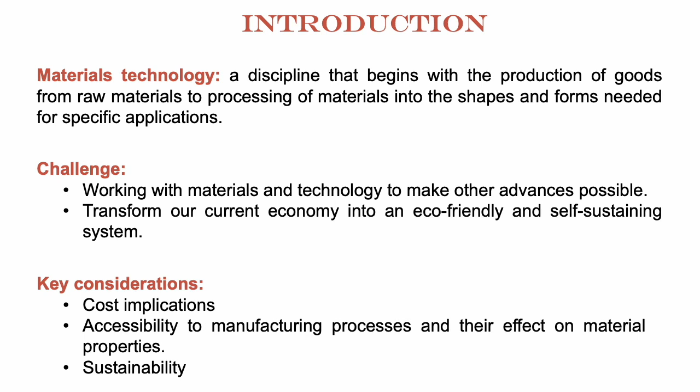Materials technology is a discipline that deals with materials and production techniques, either to design, produce, and optimize existing products or to develop new ones. The challenge we face is generally sustainability and securing our future, which is future-focused design practice. It's important to consider the cost implications of materials and production techniques, and consider sustainability as well.

This is the plan. We first define the scope of the subject, and then ideally identify the needs or problems, because when thinking interdisciplinary, since we're coming from different design backgrounds, we will have specific requirements of materials. I'd advise you keep that in mind throughout the subject. Think interdisciplinary, think about your specific discipline, what you would require materials for, what the specific requirements of materials and processes are, and then we'll focus on applications.

Let's expand a bit more. Module 1 runs similar to Module 2, and Module 3 would be the block in person. The important thing is that each day it's advisable that you get together as a peer-to-peer discussion on whatever we've done in class or as self-study. Get together with someone in class just to keep in check and see if you're on the right track, or see what the other person is doing, because the key thing is interdisciplinary—it's not going to be the same for everyone, as you'd expect. So it's important to have these discussions afterwards.

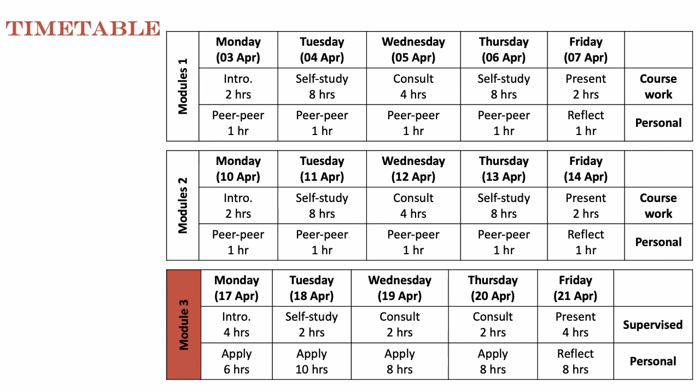Afterwards, again, you'll be given time to apply what we would have introduced and spoken about. These are the actual dates that we'll be doing these different tasks.

This gives a general idea of the outcomes or deliverables, the things I'm going to ask of you from the content we would have covered. It might not necessarily be all of them, but some of them. The first one being the analysis of articles, which you have.

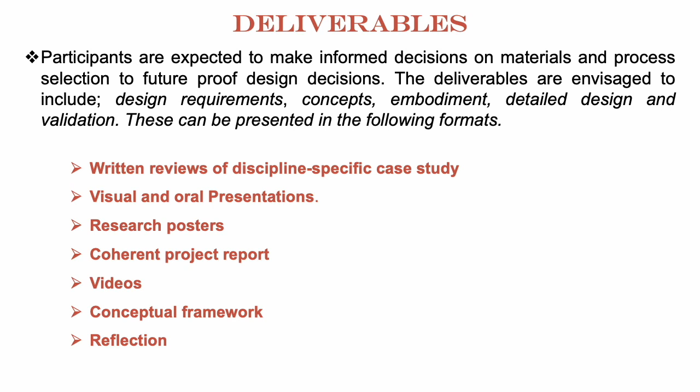That's why you have to engage afterwards in the peer-to-peer, so we're creating a culture of shared ownership. The objective of materials technology is to recognize the impact that materials and technology have on our world today, and make informed decisions regarding material selection using a list of requirements.

The list of requirements comes into play because it depends on what you're trying to do or what you need materials for. You need to synthesize the key concepts, because when you think of materials, it's not necessarily the material you're looking for—it's what the material offers, the property attributes. Not all of them are necessary, hence you need to synthesize the key concepts into a coherent, structured material selection, choosing the material based on the property attributes materials can offer.

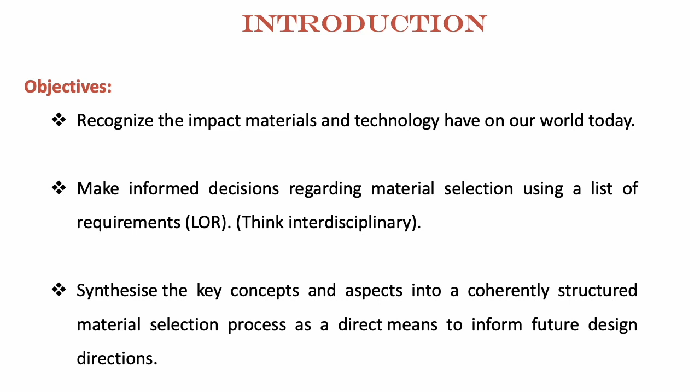That will inform the future design direction. So in general, you will bump into design factors depending on your discipline. You need your design to do a specific function or to have a purpose, and you need to have a specific context.

Depending on the discipline, or maybe in all disciplines, we're hoping for our designs to be human-centered. We're looking for creativity and innovation, visual, tactile, and aesthetic qualities. We're looking for sustainability, we need to consider costs, and we need to consider legal responsibilities because they restrict what we can do—that has to be considered as well.

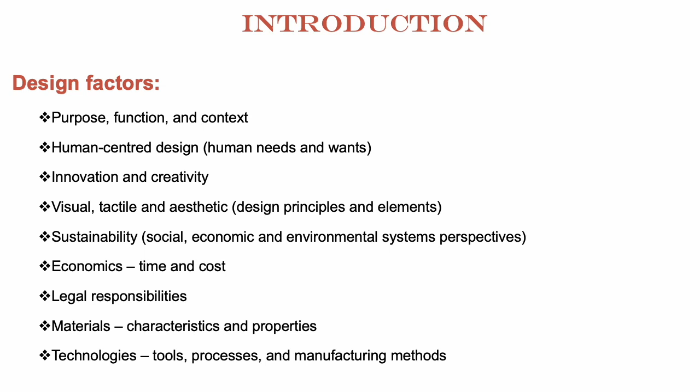Materials technology: we need to consider materials because, for the purpose of function, you can have materials that help meet specific functions or purposes—hence the material selection and the processes to achieve certain purposes, functions, or contexts. Certain processes work better than others to achieve what you're trying to do. So, coming to the context of this subject guide, we're introducing materials and processing techniques.

If you think about where you are now and look around, what materials do you see? Bear in mind that materials are substances out of which things are made. So you can realize how broad materials can be.

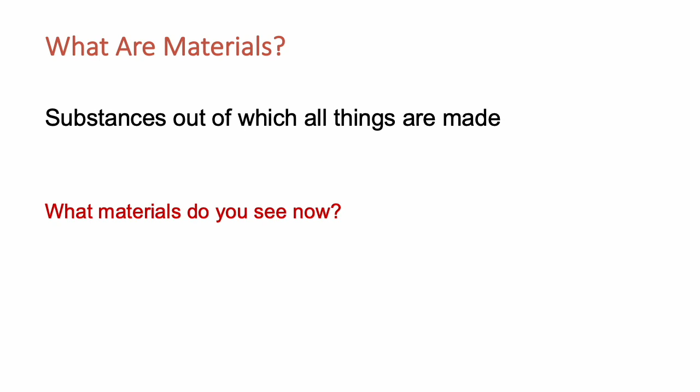Throughout history, we've had new materials being grown, designed, or manufactured, and they change how processes work—processes have to change to best suit the new materials that come into being. So materials, technology, and science are interlinked and influence each other—the technology advancement, the science advancement, and the advancement of materials themselves are all interlinked because they influence each other throughout history.

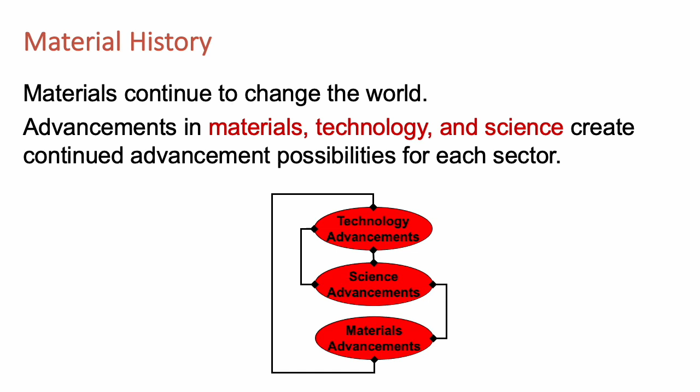That's what's been happening—you have new materials, and you can't process them the same way as you used to process the previous ones. Scientists in laboratories create or generate new materials that influence new technologies, and so on. So to understand materials, we first need to understand certain things.

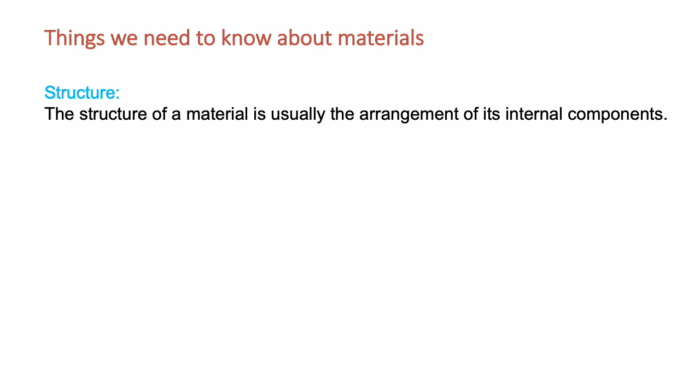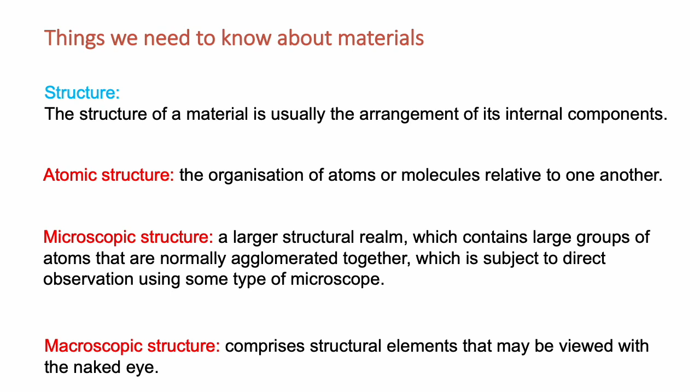The first thing we need to consider is structure, which can be considered in terms of atomic, microscopic, or macroscopic structure. We need to understand structure if we want to understand materials. Materials do what they need to do because of, one, structure, and again because of properties and processing—how you process the materials influences the functionality of the material.

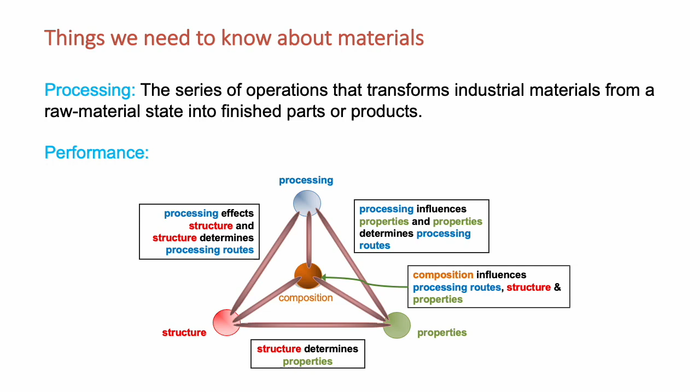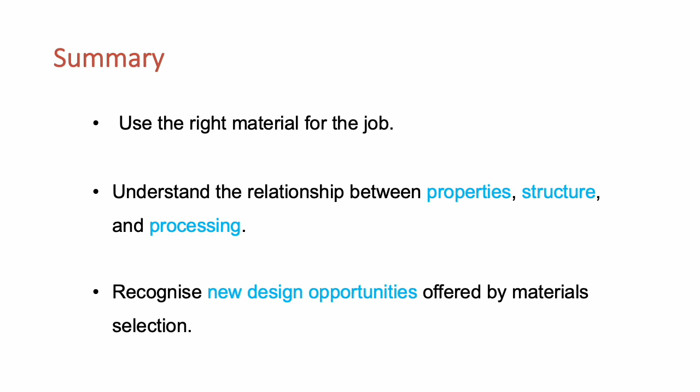As you can see in the diagram here, processing will influence both the structure and the properties. So in summary, all we are trying to do is use the right material for the right job. We need to understand the relationship between properties, structure, and processing, because they influence each other, and we need to recognize new design opportunities offered by materials and select the appropriate ones.

So to understand the classification, we can go backwards and say materials form part of material science and engineering. We have different materials suitable for engineering, for physicists, for biologists, for chemists, and for you guys as designers—product design, engineering design, architecture, graphic design, and so on. You are likely in your discipline to deal with some of these materials, if not all.

The important thing is the classification of materials does not change. What changes is the application in different disciplines. So we need to understand the distinguishing characteristics of the different materials so we know how applicable they are in our different disciplines.

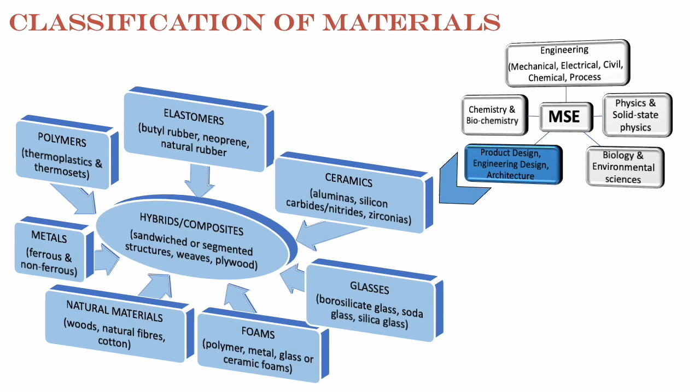And for instance, polymers will always be polymers, classified as either thermoset or thermoplastics, and that doesn't change. What changes is the applicability of these classes to different disciplines, which is for you guys to figure out. For fashion, it will be either organic or natural materials, or synthetic materials as well. We just need to think interdisciplinary in terms of classification and distinguishing characteristics to choose the best material for what we're trying to do in our different design disciplines.

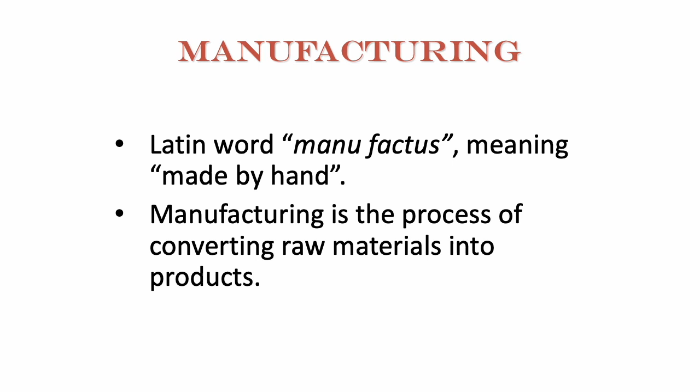So in terms of manufacturing, now that we've covered classification, we go into the processing techniques. From the Latin word manu factus, meaning made by hand, manufacturing is the process of converting raw materials into products, which links well to materials technology: the discipline that deals with converting raw materials using different processing techniques into functional goods.

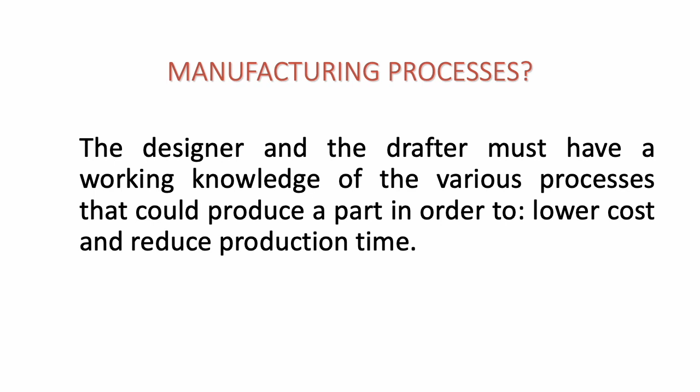So as designers, why do you think it's important to study manufacturing processes? The manufacturing process starts with design first. Then after design, you select the appropriate materials for your design. Then you need to select the appropriate method of producing your design. These three things are important.

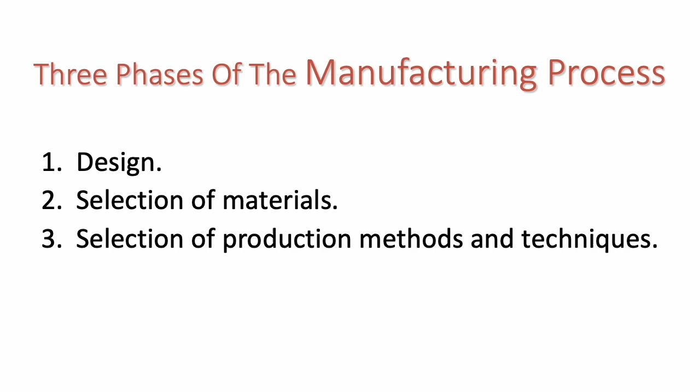These three things are important in the manufacturing part of materials technology. It's not necessarily focusing on manufacturing, but it links to you as designers: you need to design, select the appropriate materials, and select the appropriate production techniques for what you're trying to do, since some are more suitable than others. You can think of this in the context of your own discipline, but I'll use this example to illustrate the point.

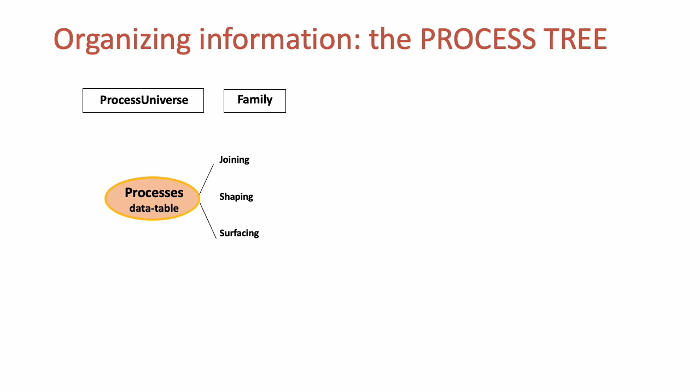Choose the right processes—there's a hierarchy you can use. When we get to block week, this will be a typical outcome to show your process work and what informed your choice of processing techniques and materials. So you have a database, because you don't necessarily need to focus on manufacturing, but you need to know about it. You can go to the database and figure out what processing techniques are at your disposal.

Depending on what you're trying to do—join, shape, or do a surface treatment—you can make a choice within those processes. If it's shaping, that can again be broken down into different types of processes. The aim is to choose the best one. What are the shaping methods? Casting, deformation, molding, composite, powder shaping techniques, or rapid prototyping.

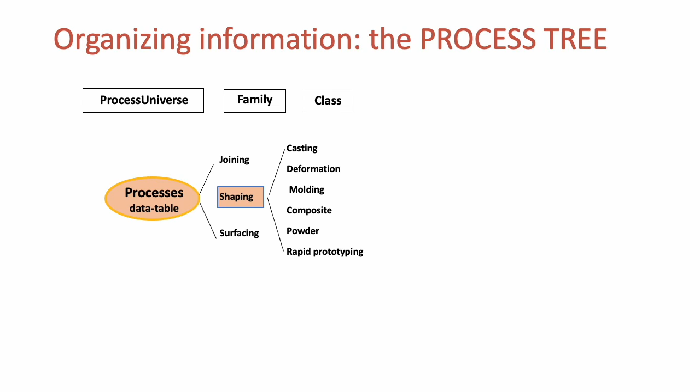Which one is best? If you think it's molding, what are the different ways you can mold? Compression—then you'd need to know the types of materials that work best for compression processing, or rotational molding, or injection, and so on. If it's injection, what are the typical costs associated with this? What tolerances can I achieve? What are the specific shapes, the intricacies of what I'm trying to do?

So this has to translate into your choice of processes or materials stepwise, to show that you've covered all angles. This is the kind of thing I would look for in a technical report when you're talking about materials and processes—what have you considered?

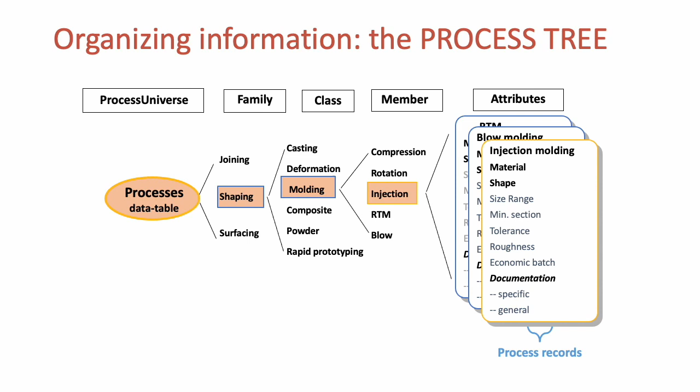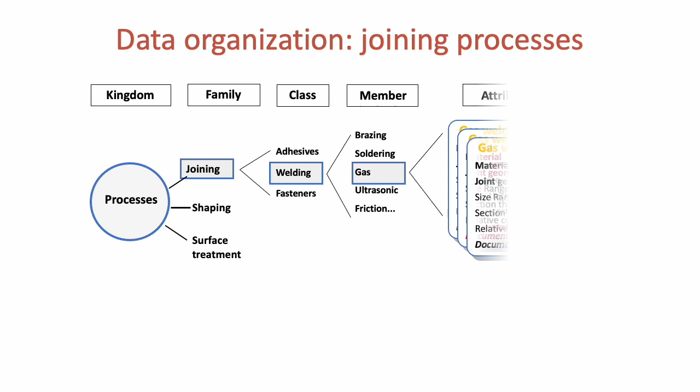If you're thinking it's joining, there are different ways you can join: adhesives, welding, fasteners. If it's welding, are you looking at brazing, soldering, gas, ultrasonic, or friction? Where is it suitable, what are you trying to do, and at what scale—while also thinking about sustainability as you go along.

Then if it's gas welding, what are the different sizes you can work with? What is the different thickness? What is the cost, and what geometries can you get out of the process?

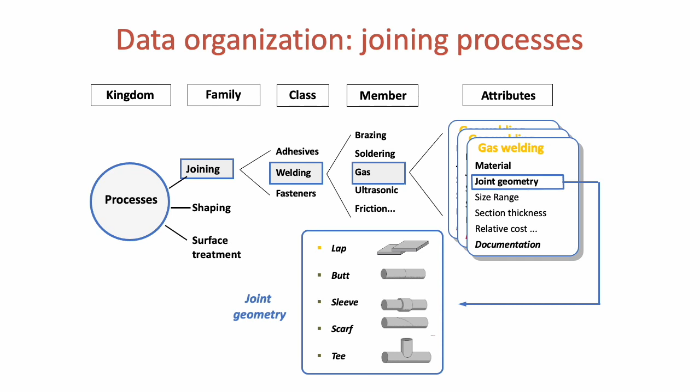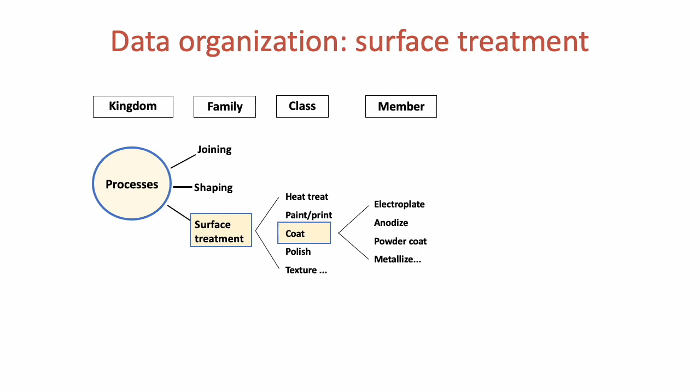So again, a stepwise way of selecting the processes. If it's surface treatment, there are different ways you can do it: coating, polishing, heat treatment, and so on and so forth.

What is the best way to help you produce what you're trying to do as a processing technique? Because we're dealing with materials and how you work with them such that they do not negatively affect what materials offer, and such that you choose the best process that minimizes costs while not compromising quality.

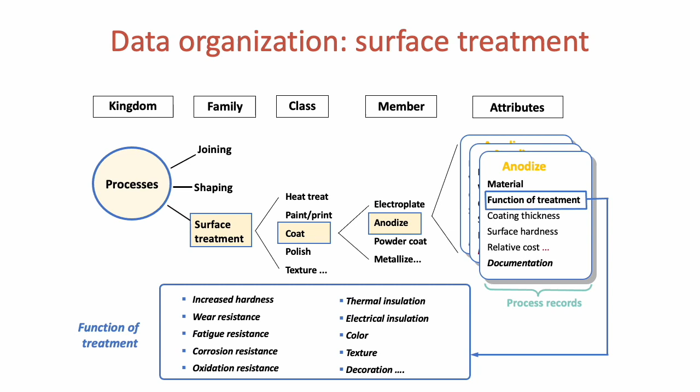So this is just a summary of what we just spoke about, for you guys to read at your leisure.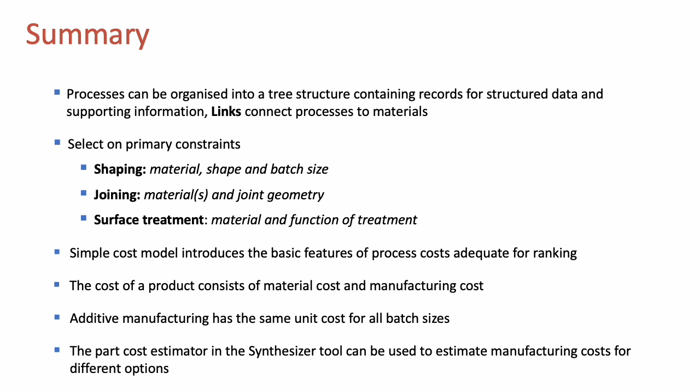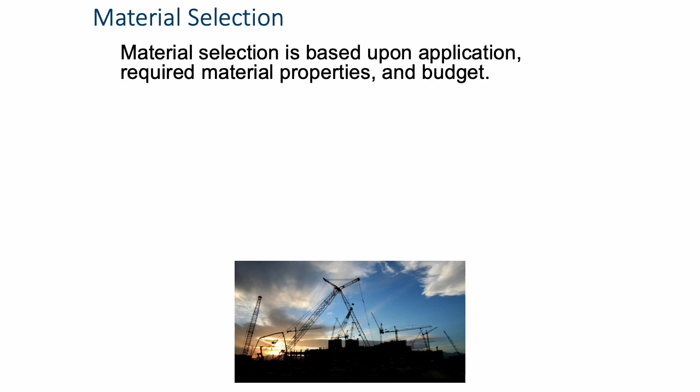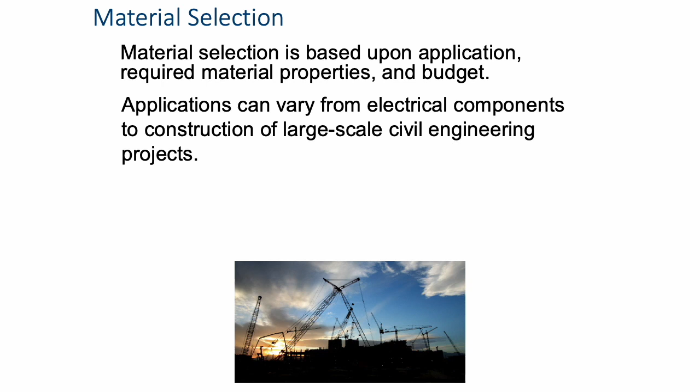Then material selection. There are different ways you can choose the best materials for what you're trying to do. The choice is based on the application, the required material properties, and the budget.

Properties, the property attributes, are what you're interested in—not necessarily the material itself, but the properties that the material can give you, whether mechanical, physical, thermal, electromagnetic, or chemical. That is what gives you purpose or function in terms of what you want to do. It can be

visual, architectural, product, fashion. It needs to serve a specific function, and there are specific materials that will help you, or that will interact with each other to help you achieve that.

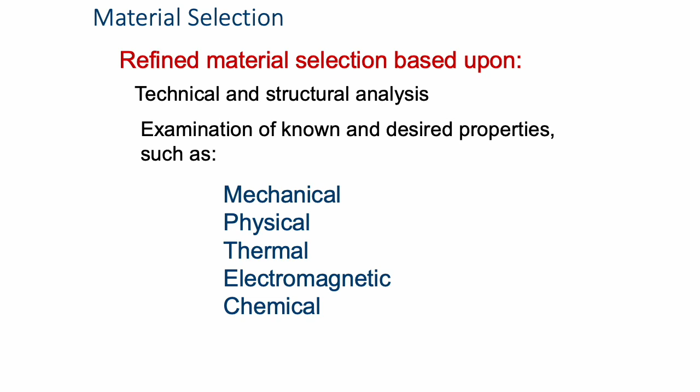It's just repetition of properties, your consideration for properties, to highlight or emphasize that you are interested in property attributes and not necessarily the material.

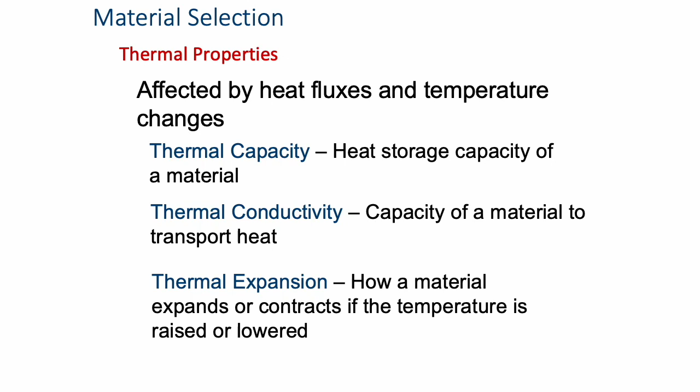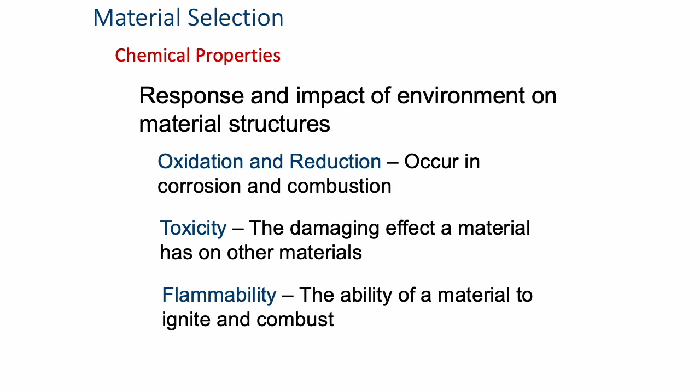And then again, thinking interdisciplinary: what does this mean in my own design discipline in terms of materials? What do I use materials for? What do I want them to do? I'm just skipping through this quickly because they are self-explanatory in a way, and you can read them in your own time.

Then generally, when you're selecting materials, the steps might be slightly different, but generally, as we've been mentioning, you have to consider the requirements. What are you trying to do? Decide on the requirements of your application.

Second step: what are the possible materials that you have at your disposal to achieve your design requirements? So deciding on possible materials that can be used in the application.

Having the possible materials, then decide on what changes in the material properties are needed, if anything. You need to consider this because of how you process material—like how we saw that interlinking, the influence between the structure, the properties, and the process. They influence each other, so you need to consider that as well.

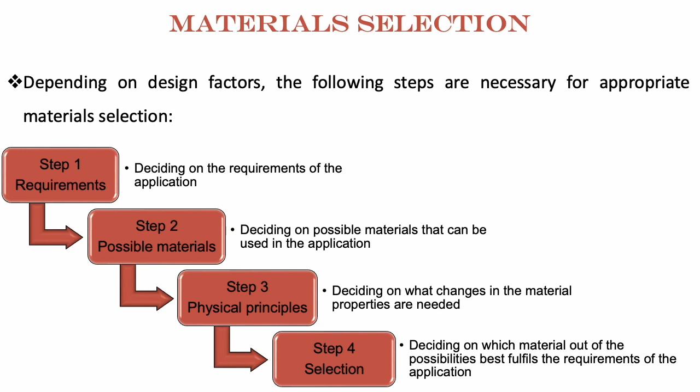The final step is deciding which material, out of the possible ones you have, is best or fulfills the requirements from step one, because more than one might, but there will be a better one. So if you follow these steps, it will help you narrow your selection.

So these are the materials that I have. How am I going to process this such that they don't negatively influence the property attributes that the material gives me, and still get the functions that I need out of that?

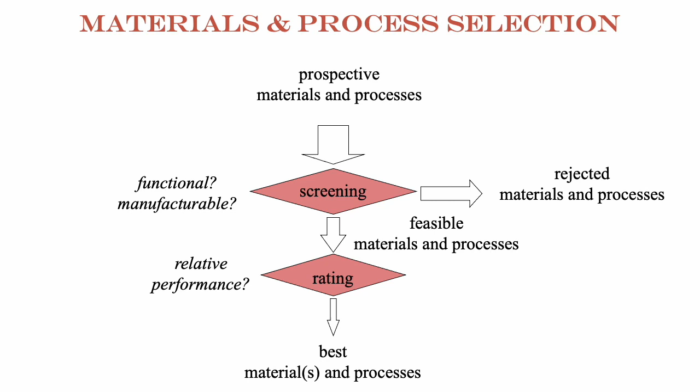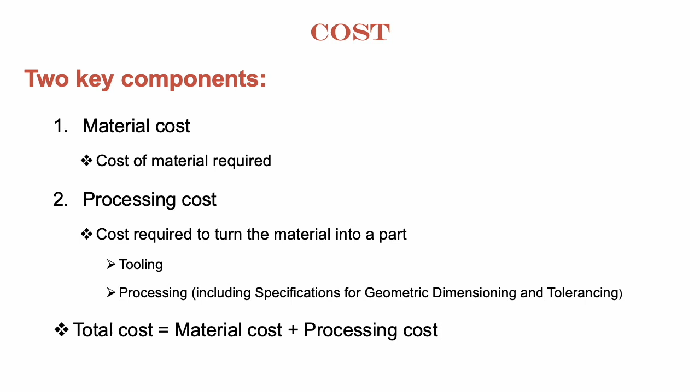Cost, as mentioned, is very important. In terms of materials and processing techniques, cost refers to the cost of the material itself and the cost of the processing—that gives you the total cost. We're trying to minimize the cost.

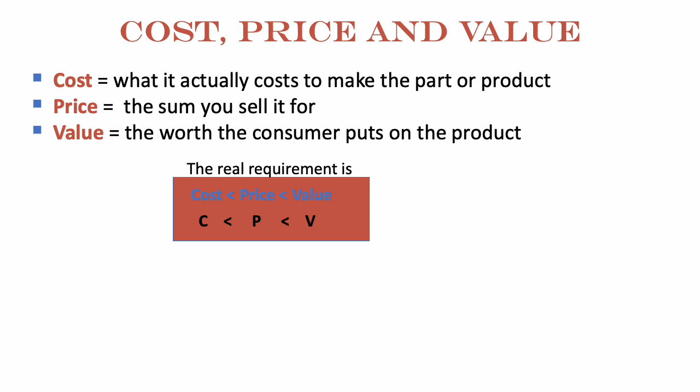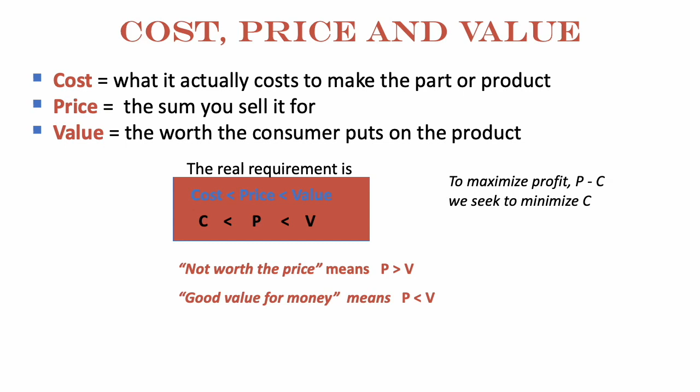This just gives you a distinction between cost, price, and value. What we're trying to do is maximize value and minimize cost. That way, we have profits being maximized. We achieve this by minimizing the material and manufacturing cost without compromising quality.